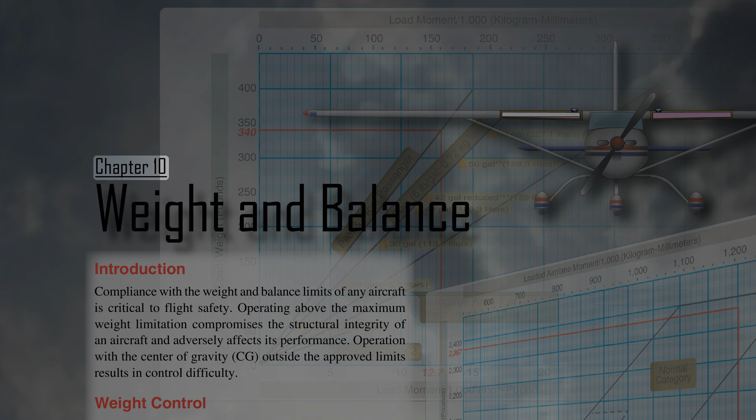Introduction. Compliance with the weight and balance limits of any aircraft is critical to flight safety. Operating above the maximum weight limitation compromises the structural integrity of an aircraft and adversely affects its performance. Operation with the center of gravity, CG, outside the approved limits results in control difficulty.

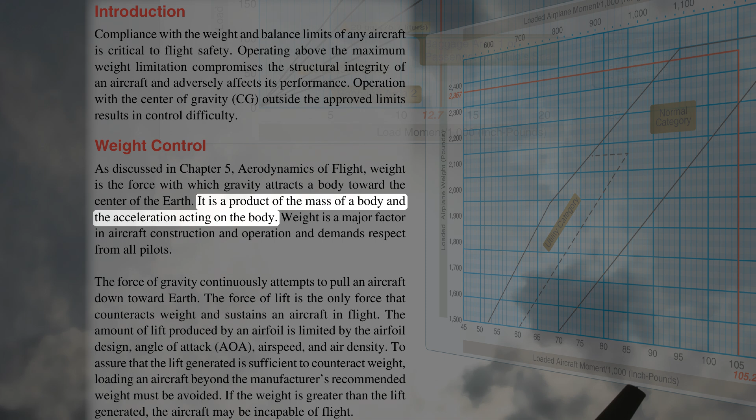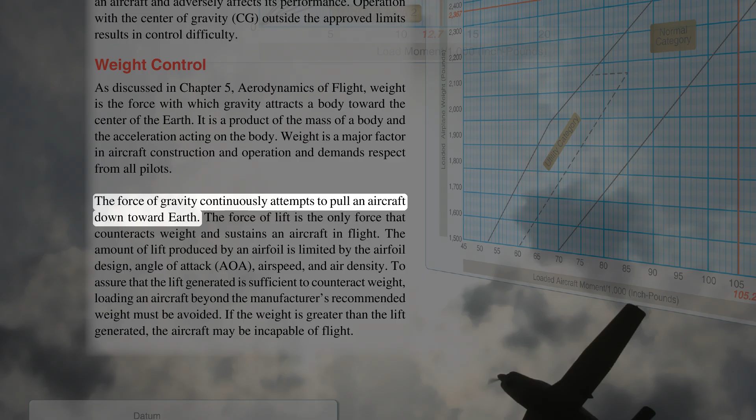Weight control. As discussed in Chapter 5, Aerodynamics of Flight, weight is the force with which gravity attracts a body toward the center of the Earth. It is a product of the mass of a body and the acceleration acting on the body. Weight is a major factor in aircraft construction and operation and demands respect from all pilots. The force of gravity continuously attempts to pull an aircraft down toward Earth. The force of lift is the only force that counteracts weight and sustains an aircraft in flight.

The amount of lift produced by an airfoil is limited by the airfoil design, angle of attack, airspeed, and air density. To assure that the lift generated is sufficient to counteract weight, loading an aircraft beyond the manufacturer's recommended weight must be avoided. If the weight is greater than the lift generated, the aircraft may be incapable of flight.

Effects of weight. Any item aboard an aircraft that increases the total weight is undesirable for performance. Manufacturers attempt to make an aircraft as light as possible without sacrificing strength or safety. The pilot should always be aware of the consequences of overloading. An overloaded aircraft may not be able to leave the ground, or if it does become airborne, it may exhibit unexpected and unusually poor flight characteristics.

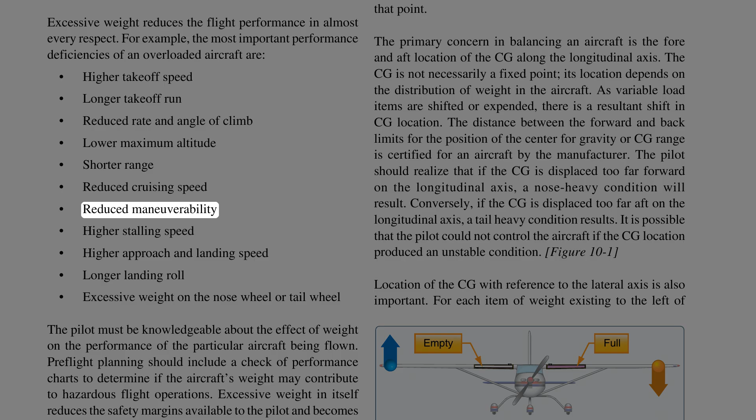If not properly loaded, the initial indication of poor performance usually takes place during takeoff. Excessive weight reduces the flight performance in almost every respect. For example, the most important performance deficiencies of an overloaded aircraft are higher takeoff speed, longer takeoff run, reduced rate and angle of climb, lower maximum altitude, shorter range, reduced cruising speed, reduced maneuverability, higher stalling speed, higher approach and landing speed, longer landing roll, and excessive weight on the nosewheel or tailwheel.

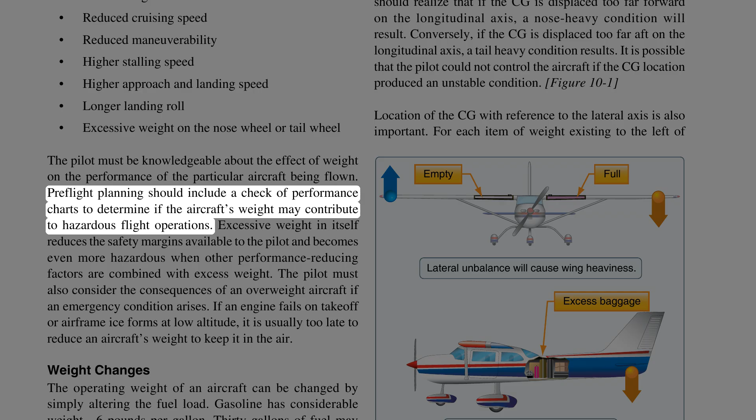The pilot must be knowledgeable about the effect of weight on the performance of the particular aircraft being flown. Pre-flight planning should include a check of performance charts to determine if the aircraft's weight may contribute to hazardous flight operations. Excessive weight in itself reduces the safety margins available to the pilot and becomes even more hazardous when other performance-reducing factors are combined with excess weight.

The pilot must also consider the consequences of an overweight aircraft if an emergency condition arises. If an engine fails on takeoff or airframe ice forms at low altitude, it is usually too late to reduce an aircraft's weight to keep it in the air.

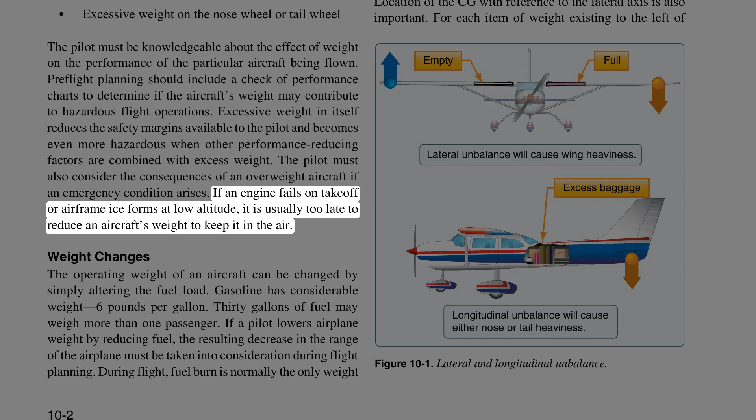Weight changes. The operating weight of an aircraft can be changed by simply altering the fuel load. Gasoline has considerable weight, 6 pounds per gallon. 30 gallons of fuel may weigh more than one passenger. If a pilot lowers airplane weight by reducing fuel, the resulting decrease in the range of the airplane must be taken into consideration during flight planning.

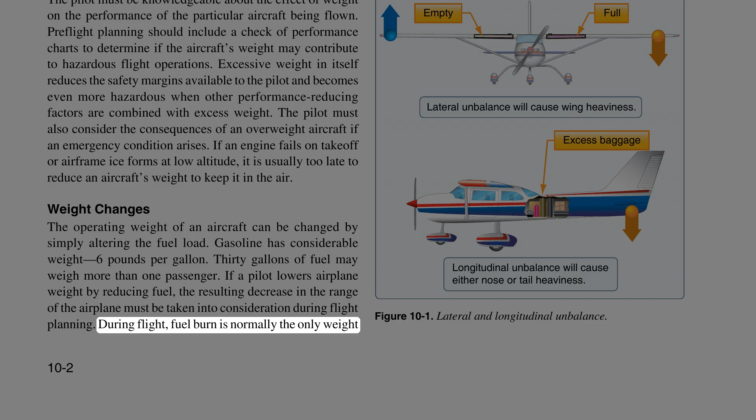During flight, fuel burn is normally the only weight change that takes place. As fuel is used, an aircraft becomes lighter and performance is improved. Changes of fixed equipment have a major effect upon the weight of an aircraft. The installation of extra radios or instruments, as well as repairs or modifications, may also affect the weight of an aircraft.

Balance, stability, and center of gravity. Balance refers to the location of the CG of an aircraft, and is important to stability and safety in flight. The CG is a point at which the aircraft would balance if it were suspended at that point. The primary concern in balancing an aircraft is the fore and aft location of the CG along the longitudinal axis.

The CG is not necessarily a fixed point. Its location depends on the distribution of weight in the aircraft. As variable load items are shifted or expended, there is a resultant shift in CG location. The distance between the forward and back limits for the position of the center of gravity, or CG range, is certified for an aircraft by the manufacturer.

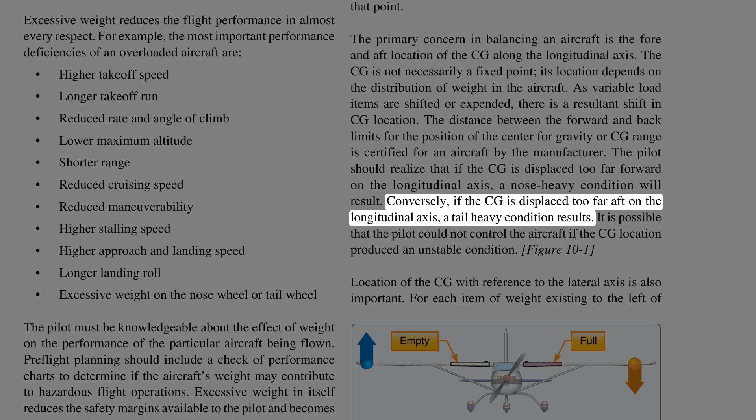The pilot should realize that if the CG is displaced too far forward on the longitudinal axis, a nose-heavy condition will result. Conversely, if the CG is displaced too far aft on the longitudinal axis, a tail-heavy condition results. It is possible that the pilot could not control the aircraft if the CG location produced an unstable condition.

Location of the CG with reference to the lateral axis is also important. For each item of weight existing to the left of the fuselage centerline, there is an equal weight existing at a corresponding location on the right. This may be upset by unbalanced lateral loading. The position of the lateral CG is not computed in all aircraft, but the pilot must be aware that adverse effects arise as a result of a laterally unbalanced condition.

In an airplane, lateral unbalance occurs if the fuel load is mismanaged by supplying the engines unevenly from tanks on one side of the airplane.

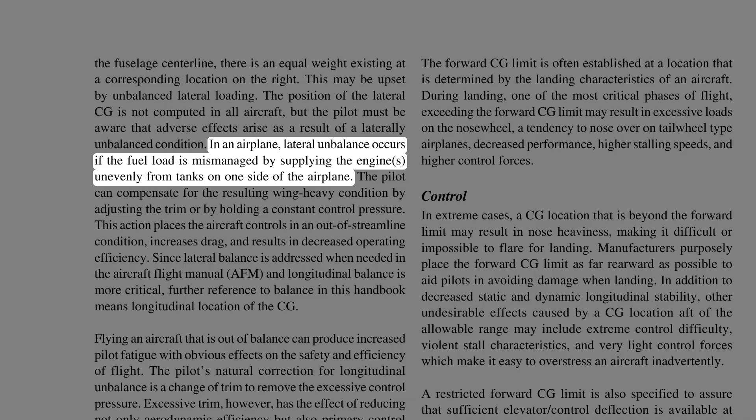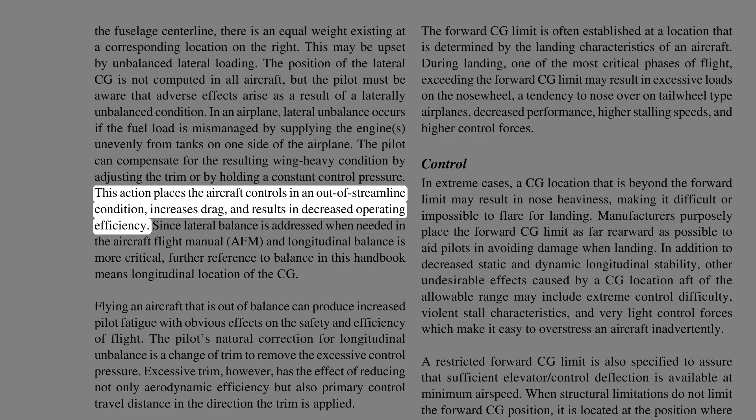The pilot can compensate for the resulting wing-heavy condition by adjusting the trim or by holding a constant control pressure. This action places the aircraft controls in an out-of-streamline condition, increases drag, and results in decreased operating efficiency.

Since lateral balance is addressed when needed in the Aircraft Flight Manual (AFM), and longitudinal balance is more critical, further reference to balance in this handbook means longitudinal location of the CG.

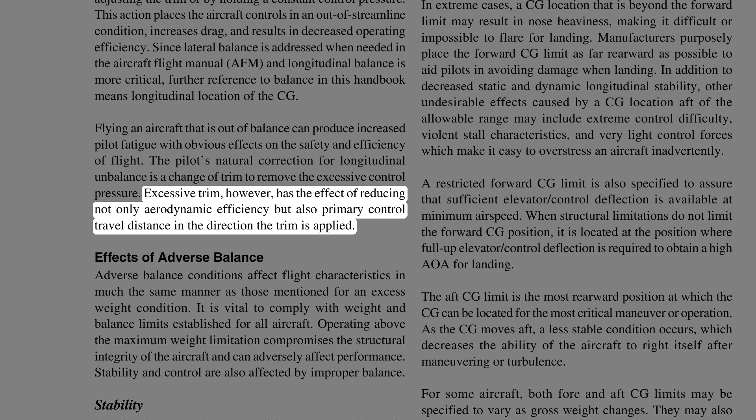Flying an aircraft that is out of balance can produce increased pilot fatigue, with obvious effects on the safety and efficiency of flight. The pilot's natural correction for longitudinal unbalance is a change of trim to remove the excessive control pressure. Excessive trim, however, has the effect of reducing not only aerodynamic efficiency but also primary control travel distance in the direction the trim is applied.

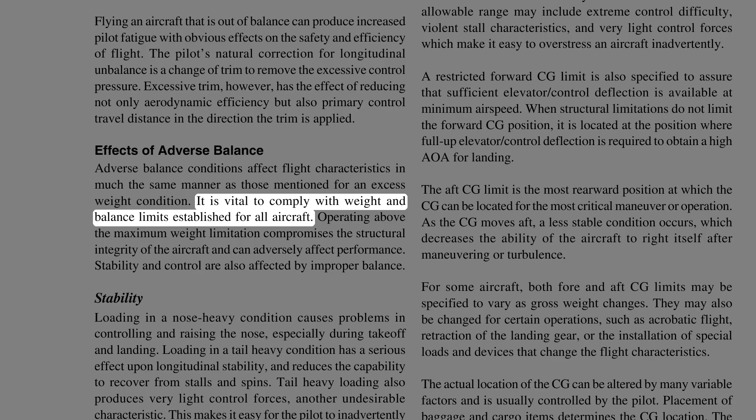Effects of adverse balance. Adverse balance conditions affect flight characteristics in much the same manner as those mentioned for an excess weight condition. It is vital to comply with weight and balance limits established for all aircraft. Operating above the maximum weight limitation compromises the structural integrity of the aircraft and can adversely affect performance. Stability and control are also affected by improper balance.

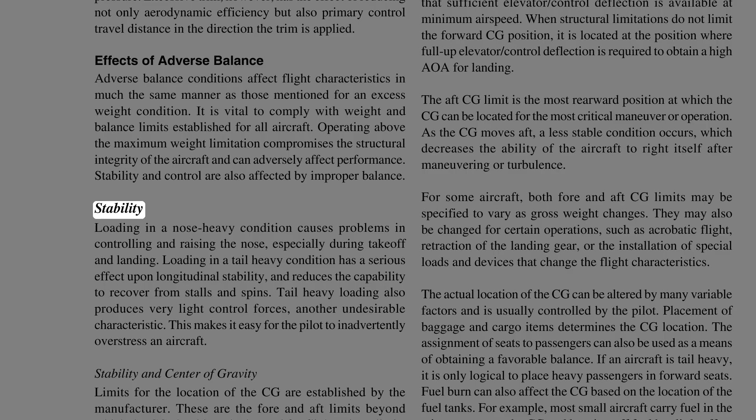Stability. Loading in a nose-heavy condition causes problems in controlling and raising the nose, especially during takeoff and landing. Loading in a tail-heavy condition has a serious effect upon longitudinal stability, and reduces the capability to recover from stalls

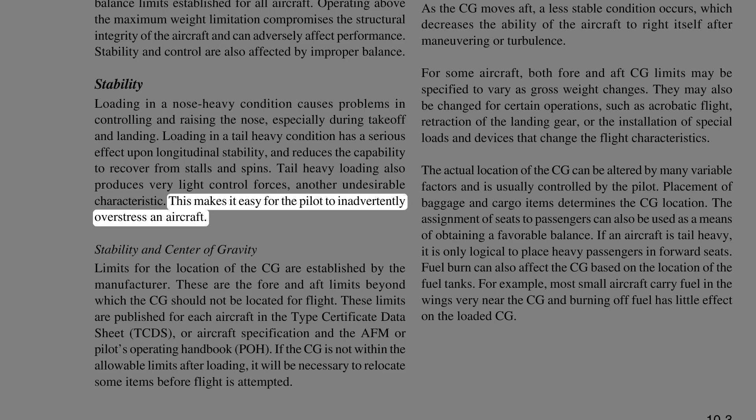and spins. Tail-heavy loading also produces very light control forces, another undesirable characteristic. This makes it easy for the pilot to inadvertently overstress an aircraft.

Stability and center of gravity. Limits for the location of the CG are established by the manufacturer. These are the fore and aft limits beyond which the CG should not be located for flight.

These limits are published for each aircraft in the Type Certificate Datasheet (TCDS), or Aircraft Specification, and the AFM or Pilot's Operating Handbook (POH). If the CG is not within the allowable limits after loading, it will be necessary to relocate some items before flight is attempted.

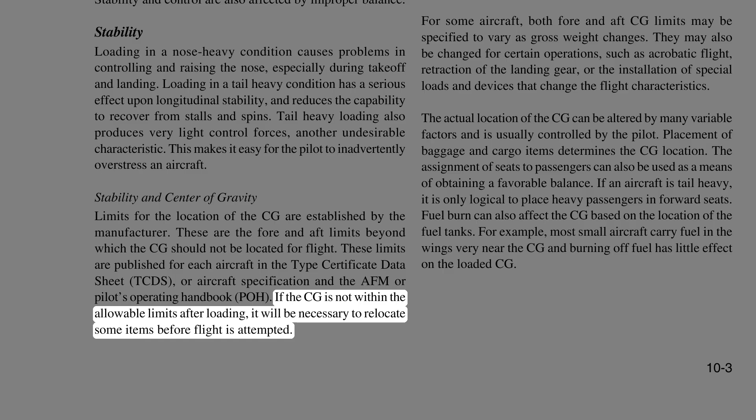The forward CG limit is often established at a location that is determined by the landing characteristics of an aircraft. During landing, one of the most critical phases of flight, exceeding the forward CG limit may result in excessive loads on the nosewheel, a tendency to nose over on tailwheel-type airplanes, decreased performance, higher stalling speeds, and higher control forces.

Control. In extreme cases, a CG location that is beyond the forward limit may result in nose heaviness, making it difficult or impossible to flare for landing. Manufacturers purposely place the forward CG limit as far rearward as possible to aid pilots in avoiding damage when landing.

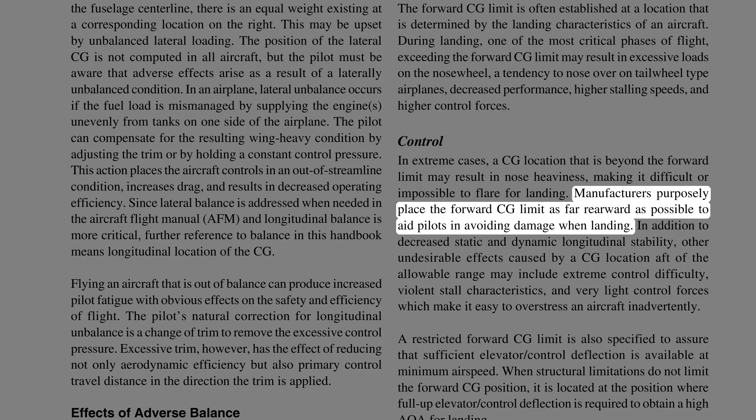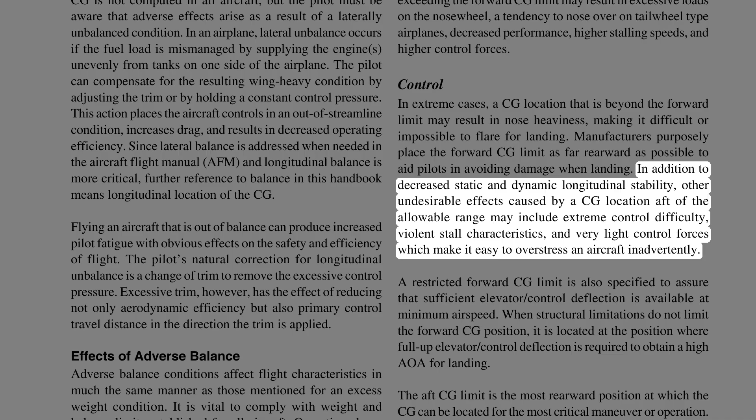In addition to decreased static and dynamic longitudinal stability, other undesirable effects caused by a CG location aft of the allowable range may include extreme control difficulty, violent stall characteristics, and very light control forces which make it easy to overstress an aircraft inadvertently. A restricted forward CG limit is also specified to assure that sufficient elevator control deflection is

available at minimum airspeed. When structural limitations do not limit the forward CG position, it is located at the position where full-up elevator control deflection is required to obtain a high angle of attack for landing.

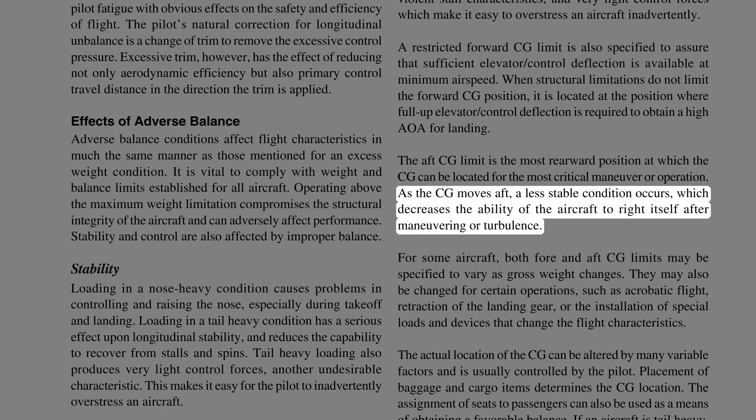The aft CG limit is the most rearward position at which the CG can be located for the most critical maneuver or operation. As the CG moves aft, a less stable condition occurs, which decreases the ability of the aircraft to right itself after maneuvering or turbulence.

For some aircraft, both fore and aft CG limits may be specified to vary as gross weight changes. They may also be changed for certain operations, such as acrobatic flight, retraction of the landing gear, or the installation of special loads and devices that change the flight characteristics.

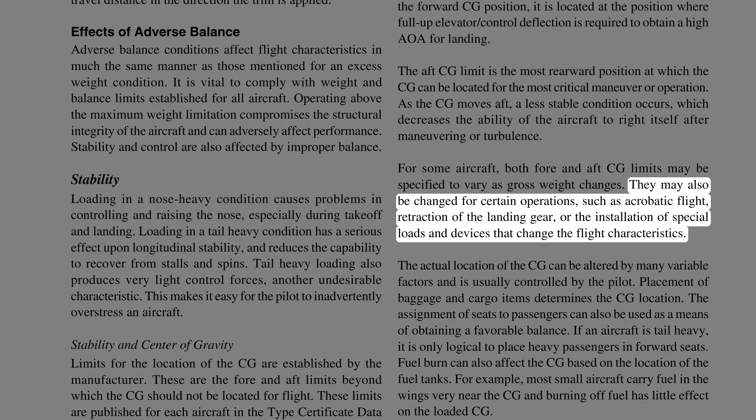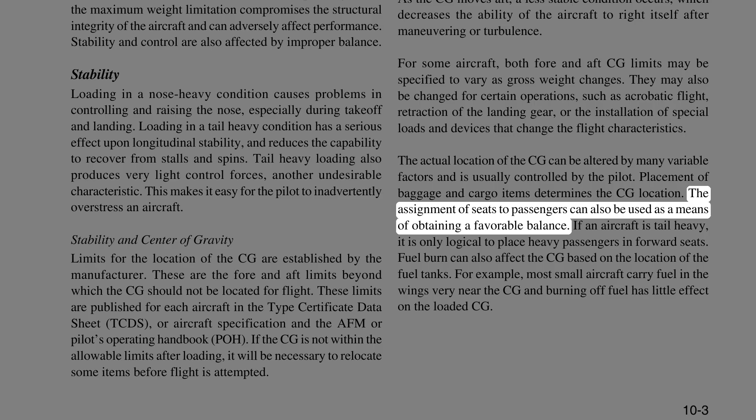The actual location of the CG can be altered by many variable factors and is usually controlled by the pilot. Placement of baggage and cargo items determines the CG location. The assignment of seats to passengers can also be used as a means of obtaining a favorable balance. If an aircraft is tail-heavy, it is only logical to place heavy passengers in forward seats.

Fuel burn can also affect the CG based on the location of the fuel tanks. For example, most small aircraft carry fuel in the wings very near the CG, and burning off fuel has little effect on the loaded CG.

Management of weight and balance control. Title 14 of the Code of Federal Regulations (14 CFR) Part 23, Section 23.23 requires establishment of the ranges of weights and CGs within which an aircraft may be operated safely.

The manufacturer provides this information, which is included in the approved AFM, TCDS, or aircraft specifications. While there are no specified requirements for a pilot operating under 14 CFR Part 91 to conduct weight and balance calculations prior to each flight, 14 CFR Part 91, Section 91.9 requires the pilot in command (PIC), to comply with the operating limits in the approved AFM.

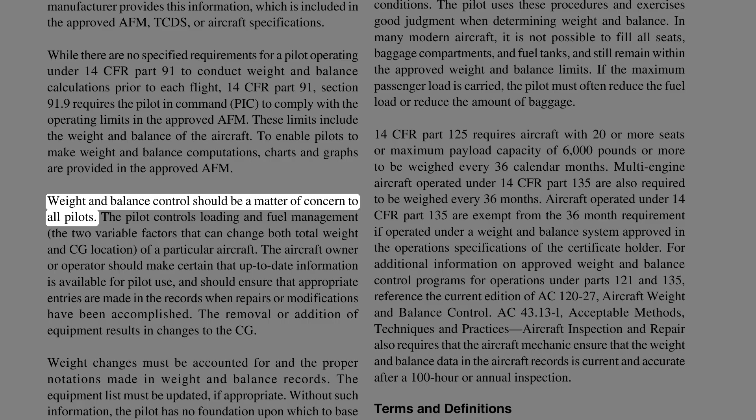These limits include the weight and balance of the aircraft. To enable pilots to make weight and balance computations, charts and graphs are provided in the approved AFM. Weight and balance control should be a matter of concern to all pilots. The pilot controls loading and fuel management, the two variable factors that can change both total weight and CG location

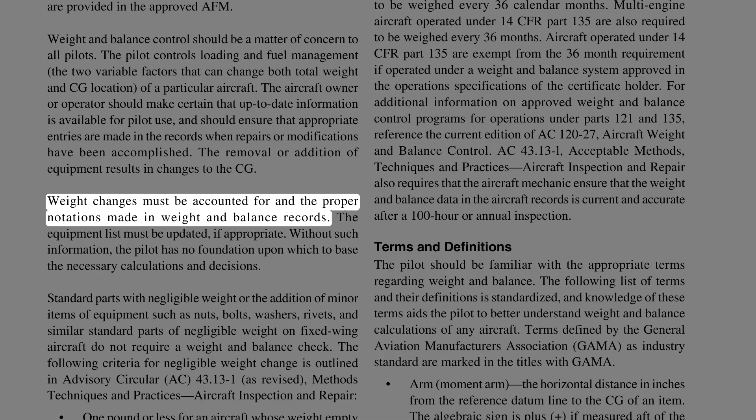of a particular aircraft. The aircraft owner or operator should make certain that up-to-date information is available for pilot use, and should ensure that appropriate entries are made in the records when repairs or modifications have been accomplished. The removal or addition of equipment results in changes to the CG. Weight changes must be accounted for and the proper notations made in weight and balance records. The equipment list must be updated, if appropriate. Without such information, the pilot has no foundation upon which to base the necessary calculations and decisions.

Standard parts with negligible weight, such as the addition of minor items of equipment like nuts, bolts, washers, rivets, and similar standard parts of negligible weight on fixed-wing aircraft, do not require a weight and balance check. The following criteria for negligible weight change is outlined in Advisory Circular AC 43.13-1, as revised, Methods, Techniques and Practices, Aircraft Inspection and Repair.

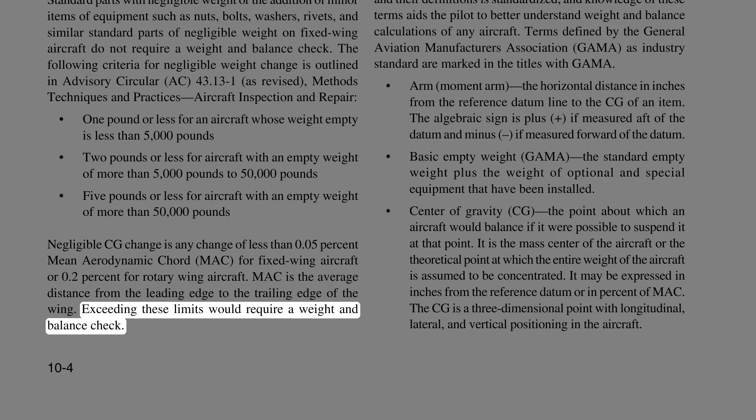1 pound or less for an aircraft whose empty weight is less than 5,000 pounds. 2 pounds or less for aircraft with an empty weight of more than 5,000 pounds to 50,000 pounds. 5 pounds or less for aircraft with an empty weight of more than 50,000 pounds. Negligible CG change is any change of less than 0.05% mean aerodynamic chord, MAC, for fixed-wing aircraft, or 0.2% for rotary-wing aircraft. MAC is the average distance from the leading edge to the trailing edge of the wing. Exceeding these limits would require a weight and balance check.

Before any flight, the pilot should determine the weight and balance condition of the aircraft. Simple and orderly procedures based on sound principles have been devised by the manufacturer for the determination of loading conditions. The pilot uses these procedures and exercises good judgment when determining weight and balance. In many modern aircraft, it is not possible to fill all seats, baggage compartments, and fuel tanks, and still remain within the approved weight and balance limits.

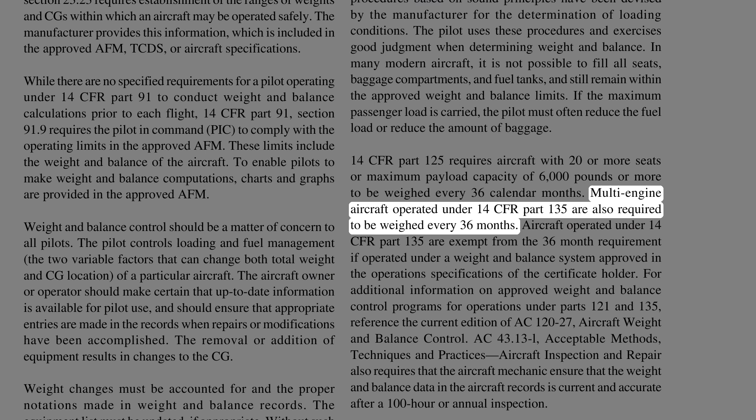If the maximum passenger load is carried, the pilot must often reduce the fuel load or reduce the amount of baggage. 14 CFR Part 125 requires aircraft with 20 or more seats or maximum payload capacity of 6,000 pounds or more to be weighed every 36 calendar months. Multi-engine aircraft operated under 14 CFR Part 135 are also required to be weighed every 36 months.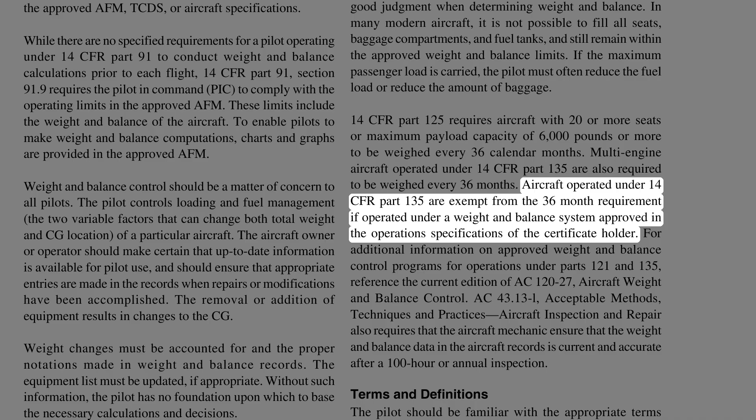Aircraft operated under 14 CFR Part 135 are exempt from the 36-month requirement if operated under a weight and balance system approved in the operation specifications of the certificate holder. For additional information on approved weight and balance control programs for operations under Parts 121 and 135, reference the current edition of AC 120-27, Aircraft Weight and Balance Control.

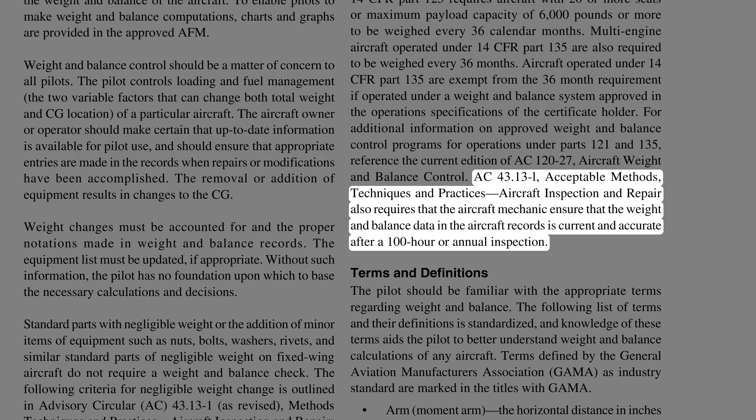AC 43.13-1, Acceptable Methods, Techniques and Practices, Aircraft Inspection and Repair, also requires that the aircraft mechanic ensure that the weight and balance data in the aircraft records is current and accurate after a 100-hour or annual inspection. Terms and definitions: the pilot should be familiar with the appropriate terms regarding weight and balance. The following list of terms and their definitions is standardized, and knowledge of these terms aids the pilot to better understand weight and balance calculations of any aircraft. Terms defined by the General Aviation Manufacturers Association, GAMA, as industry standard are marked in the titles with GAMA.

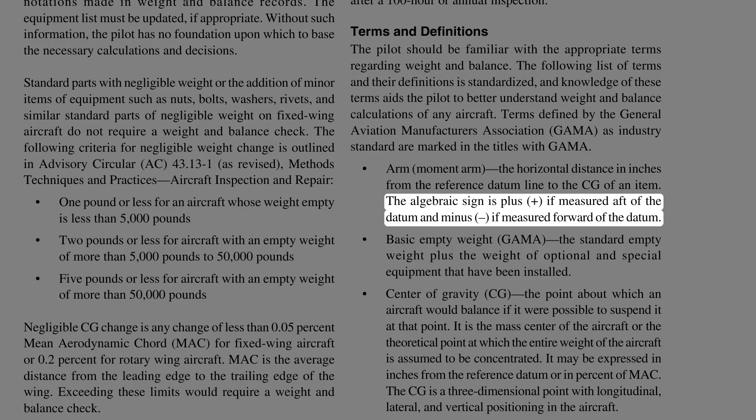Arm, or moment arm, is the horizontal distance in inches from the reference datum line to the CG of an item. The algebraic sign is plus if measured aft of the datum, and minus if measured forward of the datum. Basic empty weight (GAMA) is the standard empty weight plus the weight of optional and special equipment that have been installed. Center of gravity, CG, is the point about which an aircraft would balance if it were possible to suspend it at that point. It is the mass center of the aircraft, or the theoretical point at which the entire weight of the aircraft is assumed to be concentrated.

It may be expressed in inches from the reference datum or in percent of MAC. The CG is a three-dimensional point with longitudinal, lateral, and vertical positioning in the aircraft. CG limits are the specified forward and aft points within which the CG must be located during flight. These limits are indicated on pertinent aircraft specifications. CG range is the distance between the forward and aft CG limits indicated on pertinent aircraft specifications.

Datum, or reference datum, is an imaginary vertical plane or line from which all measurements of arm are taken. The datum is established by the manufacturer. Once the datum has been selected, all moment arms and the location of CG range are measured from this point. Delta is a Greek letter expressed by the symbol delta, used to indicate a change of values.

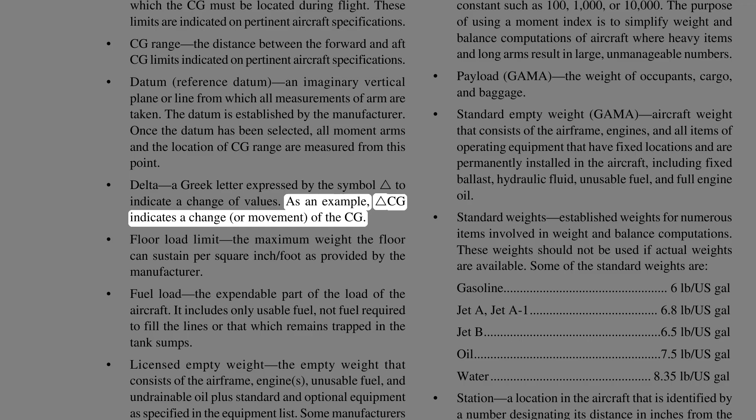As an example, delta CG indicates a change, or movement, of the CG. Floor load limit is the maximum weight the floor can sustain per square inch, foot, as provided by the manufacturer.

Fuel load is the expendable part of the load of the aircraft. It includes only usable fuel, not fuel required to fill the lines or that which remains trapped in the tank sumps.

Licensed empty weight is the empty weight that consists of the airframe, engines, unusable fuel, and undrainable oil, plus standard and optional equipment as specified in the equipment list. Some manufacturers used this term prior to standardization.

Maximum landing weight is the greatest weight that an aircraft is normally allowed to have at landing.

Maximum ramp weight is the total weight of a loaded aircraft including all fuel. It is greater than the takeoff weight due to the fuel that will be burned during the taxi and run-up operations. Ramp weight may also be referred to as taxi weight.

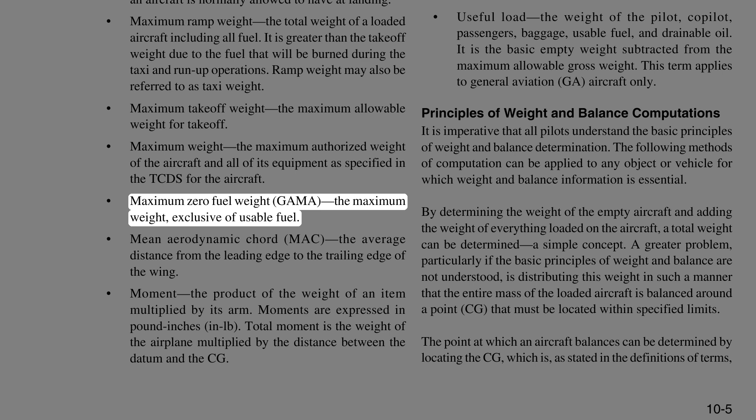Maximum takeoff weight is the maximum allowable weight for takeoff. Maximum weight is the maximum authorized weight of the aircraft and all of its equipment as specified in the TCDS for the aircraft. Maximum zero fuel weight is the maximum weight, exclusive of usable fuel.

Mean aerodynamic chord is the average distance from the leading edge to the trailing edge of the wing. Moment is the product of the weight of an item multiplied by its arm. Moments are expressed in pound-inches, or inch-pounds. Total moment is the weight of the airplane multiplied by the distance between the datum and the CG.

Moment index, or index, is a moment divided by a constant such as 100, 1000, or 10,000. The purpose of using a moment index is to simplify weight and balance computations of aircraft where heavy items and long arms result in large, unmanageable numbers.

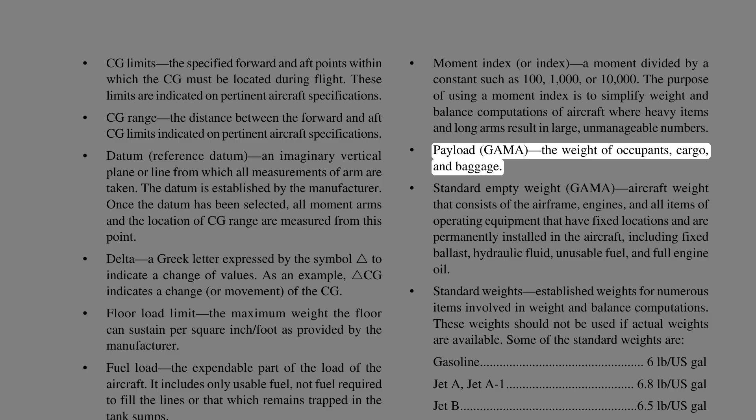Payload is the weight of occupants, cargo, and baggage. Standard empty weight is aircraft weight that consists of the airframe, engines, and all items of operating equipment that have fixed locations and are permanently installed in the aircraft, including fixed ballast, hydraulic fluid, unusable fuel, and full engine oil.

Standard weights are established weights for numerous items involved in weight and balance computations. These weights should not be used if actual weights are available.

Some of the standard weights are: gasoline, 6 pounds per US gallon; Jet A-1, 6.8 pounds per US gallon; Jet B; oil; and water, 8.35 pounds per US gallon.

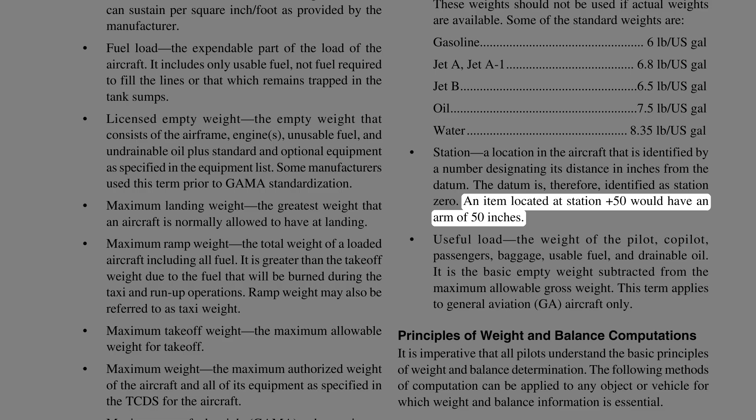The datum is, therefore, identified as Station 0. Station is a location in the aircraft that is identified by a number designating its distance in inches from the datum. An item located at station plus 50 would have an arm of 50 inches.

Useful load is the weight of the pilot, co-pilot, passengers, baggage, usable fuel, and drainable oil. It is the basic empty weight subtracted from the maximum allowable gross weight. This term applies to general aviation, GA, aircraft only.

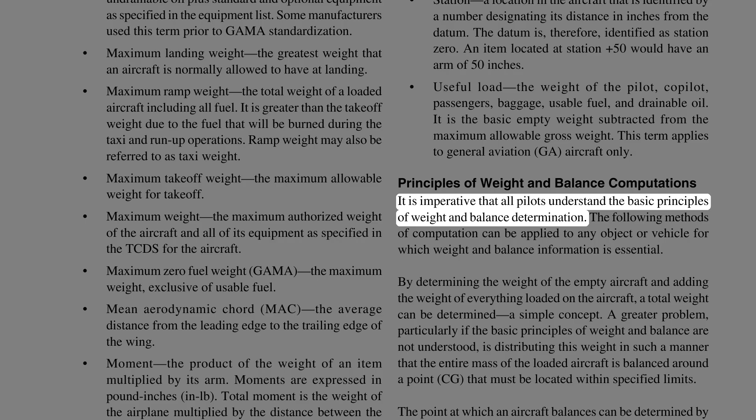Principles of weight and balance computations. It is imperative that all pilots understand the basic principles of weight and balance determination. The following methods of computation can be applied to any object or vehicle for which weight and balance information is essential.

By determining the weight of the empty aircraft and adding the weight of everything loaded on the aircraft, a total weight can be determined—a simple concept. A greater problem, particularly if the basic principles of weight and balance are not understood, is distributing this weight in such a manner that the entire mass of the loaded aircraft is balanced around a point.

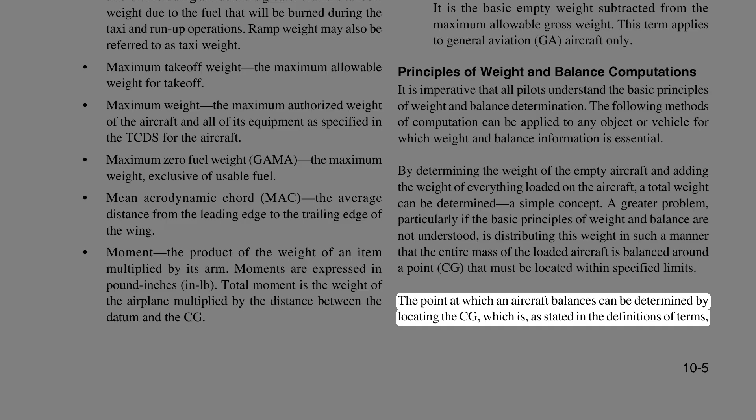That point, the CG, must be located within specified limits. The point at which an aircraft balances can be determined by locating the CG, which is, as stated in the definitions of terms, the imaginary point at which all the weight is concentrated.

To provide the necessary balance between longitudinal stability and elevator control, the CG is usually located slightly forward of the center of lift. This loading condition causes a nose-down tendency in flight, which is desirable during flight at a high angle of attack and slow speeds.

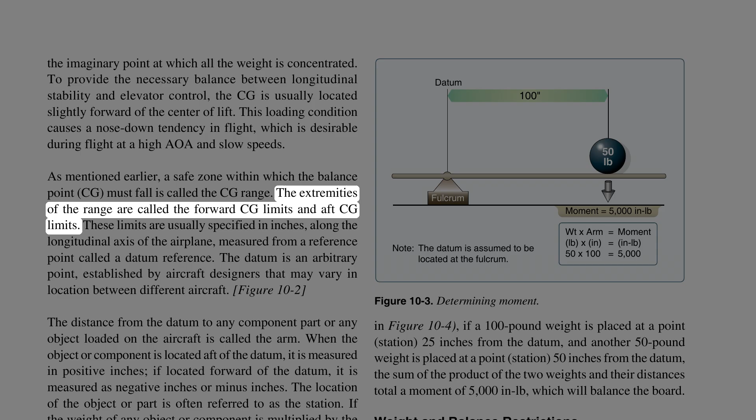As mentioned earlier, a safe zone within which the balance point, CG, must fall is called the CG range. The extremities of the range are called the forward CG limits and aft CG limits. These limits are usually specified in inches, along the longitudinal axis of the airplane, measured from a reference point called a datum reference.

The datum is an arbitrary point established by aircraft designers that may vary in location between different aircraft. The distance from the datum to any component part or any object loaded on the aircraft is called the arm. When the object or component is located aft of the datum, it is measured in positive inches.

If located forward of the datum, it is measured as negative inches, or minus inches. The location of the object or part is often referred to as the station.

If the weight of any object or component is multiplied by the distance from the datum, the arm, the product is the moment. The moment is the measurement of the gravitational force that causes a tendency of the weight to rotate about a point or axis, and is expressed in inch-pounds.

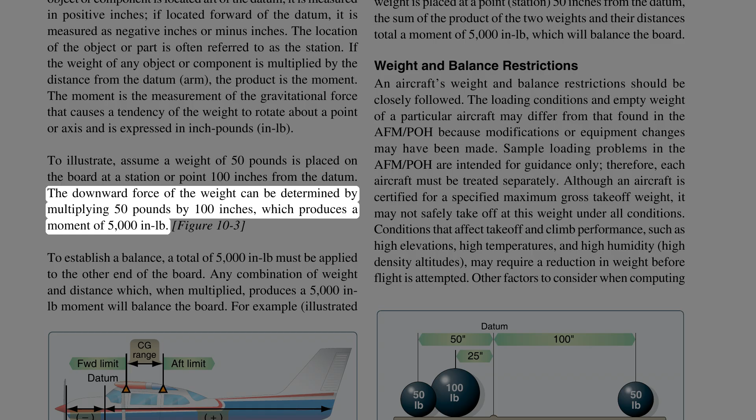To illustrate, assume a weight of 50 pounds is placed on the board at a station, or point, 100 inches from the datum. The downward force of the weight can be determined by multiplying 50 pounds by 100 inches, which produces a moment of 5,000 inch-pounds.

To establish a balance, a total of 5,000 inch-pounds must be applied to the other end of the board. Any combination of weight and distance which, when multiplied, produces a 5,000 inch-pound moment will balance the board.

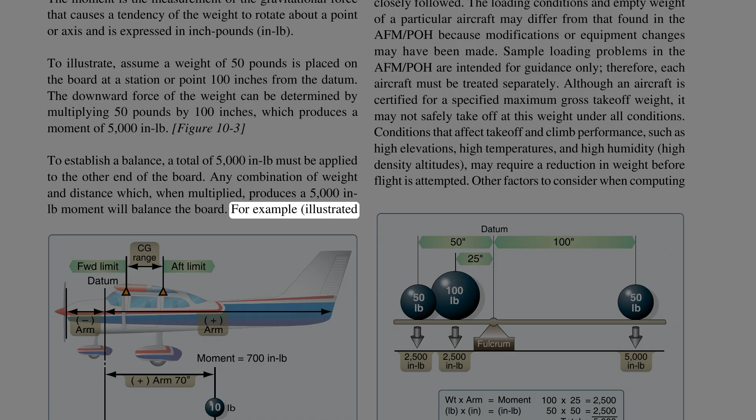For example, illustrated in figure 10-4, if a 100-pound weight is placed at a point, station, 25 inches from the datum, and another 50-pound weight is placed at a point, station, 50 inches from the datum, the sum of the products of the two weights and their distances total a moment of 5,000 inch-pounds, which will balance the board.

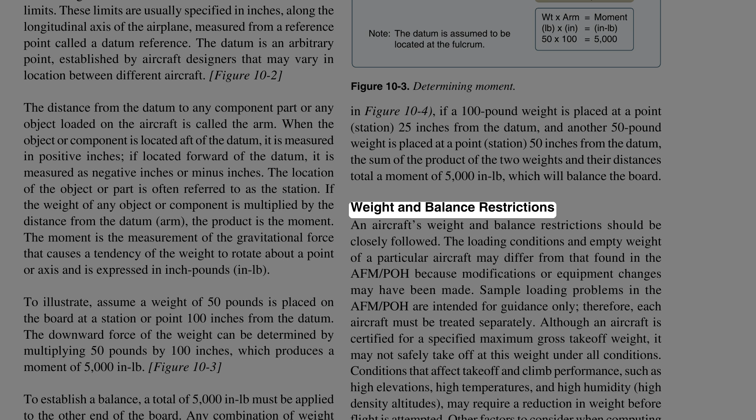Weight and balance restrictions. An aircraft's weight and balance restrictions should be closely followed. The loading conditions and empty weight of a particular aircraft may differ from that found in the AFM/POH because modifications or equipment changes may have been made.

Sample loading problems in the AFM/POH are intended for guidance only. Therefore, each aircraft must be treated separately.

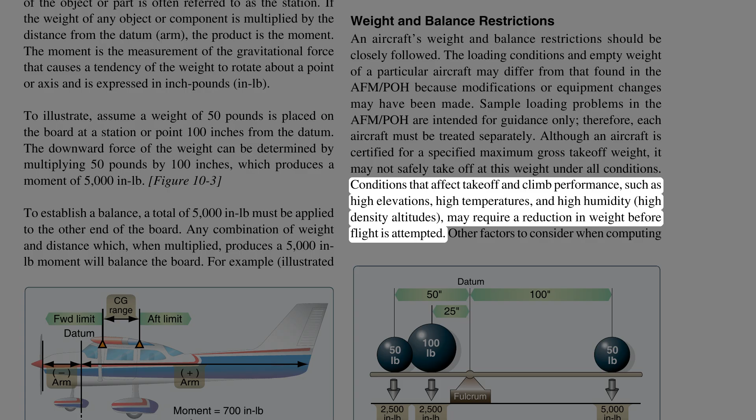Although an aircraft is certified for a specified maximum gross takeoff weight, it may not safely take off at this weight under all conditions. Conditions that affect takeoff and climb performance, such as high elevations, high temperatures, and high humidity, and high-density altitudes, may require a reduction in weight before flight is attempted.

Other factors to consider when computing weight and balance distribution prior to takeoff are runway length, runway surface, runway slope, surface wind, and the presence of obstacles. These factors may require a reduction in or redistribution of weight prior to flight.

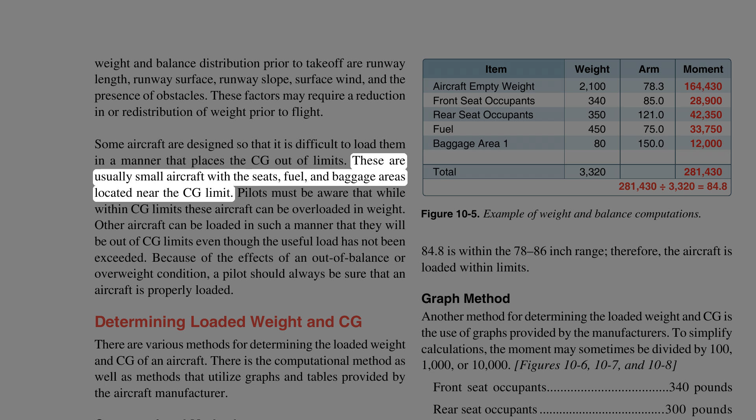Some aircraft are designed so that it is difficult to load them in a manner that places the CG out of limits. These are usually small aircraft with the seats, fuel, and baggage areas located near the CG limit. Pilots must be aware that while within CG limits, these aircraft can be overloaded in weight.

Other aircraft can be loaded in such a manner that they will be out of CG limits even though the useful load has not been exceeded. Because of the effects of an out-of-balance or overweight condition, a pilot should always be sure that an aircraft is properly loaded. Determining loaded weight and CG.

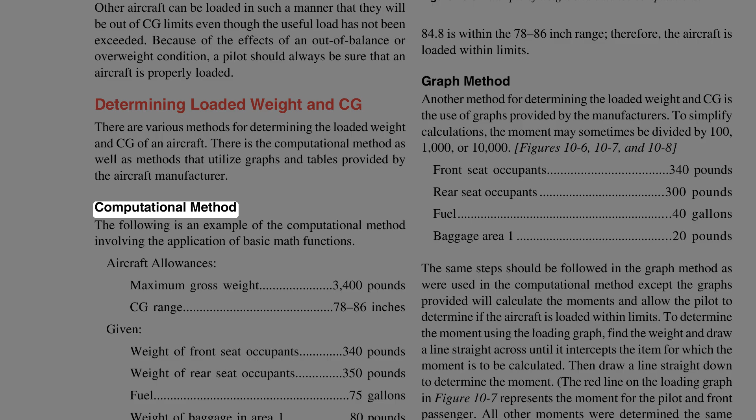There are various methods for determining the loaded weight and CG of an aircraft. There is the computational method as well as methods that utilize graphs and tables provided by the aircraft manufacturer. Computational method: the following is an example of the computational method involving the application of basic math functions.

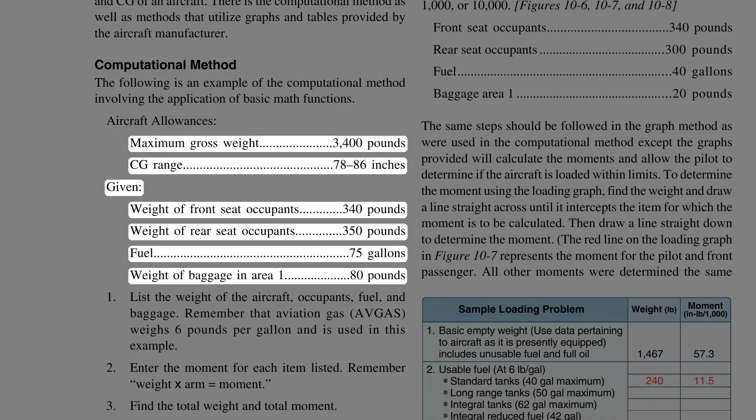Aircraft allowances: maximum gross weight 3,400 pounds, CG range 78 to 86 inches given. Weight of front seat occupants 340 pounds, weight of rear seat occupants 350 pounds, fuel 75 gallons, weight of baggage in area 1 80 pounds. List the weight of the aircraft, occupants, fuel, and baggage. Remember that aviation gas, avgas, weighs 6 pounds per gallon and is used in this example.

Enter the moment for each item listed. Remember, weight times arm equals moment. Find the total weight and total moment. To determine the CG, divide the total moment by the total weight.

Note: the weight and balance records for a particular aircraft provide the empty weight and moment, as well as the information on the arm distance.

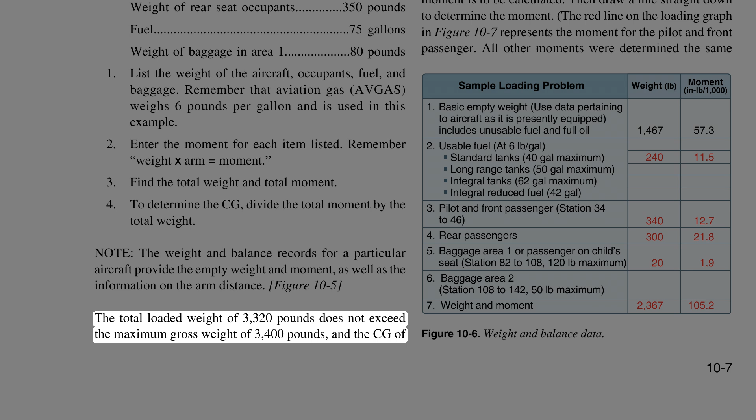The total loaded weight of 3,320 pounds does not exceed the maximum gross weight of 3,400 pounds, and the CG of 84.8 is within the 78 to 86 inch range. Therefore, the aircraft is loaded within limits.

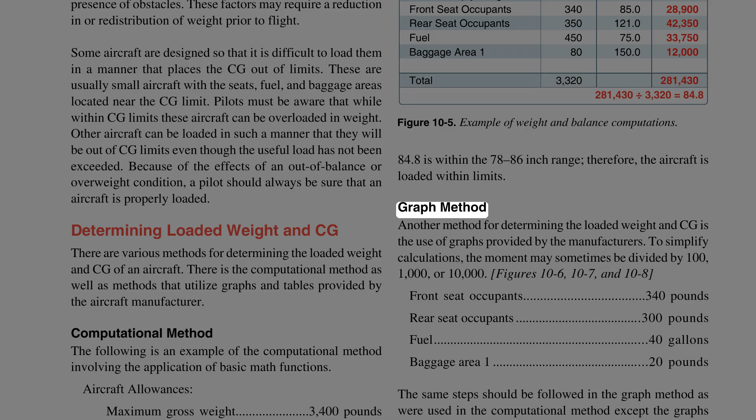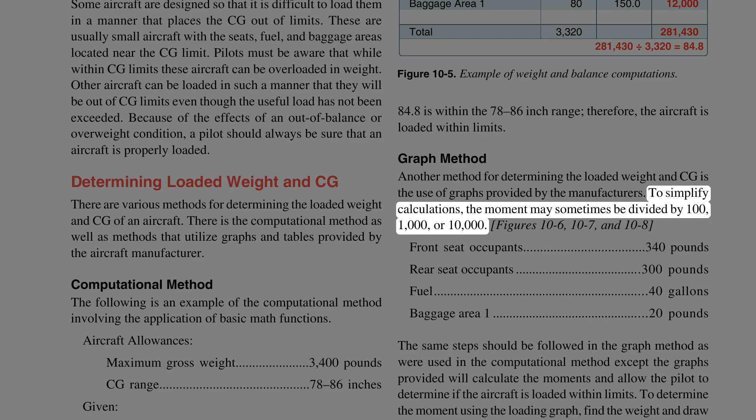Graph method. Another method for determining the loaded weight and CG is the use of graphs provided by the manufacturers. To simplify calculations, the moment may sometimes be divided by 100, 1,000, or 10,000.

Front seat occupants 340 pounds. Rear seat occupants 300 pounds. Fuel 40 gallons. Baggage area 1 20 pounds.

The same steps should be followed in the graph method as were used in the computational method, except the graphs provided will calculate the moments and allow the pilot to determine if the aircraft is loaded within limits.

To determine the moment using the loading graph, find the weight and draw a line straight across until it intercepts the item for which the moment is to be calculated. Then draw a line straight down to determine the moment.

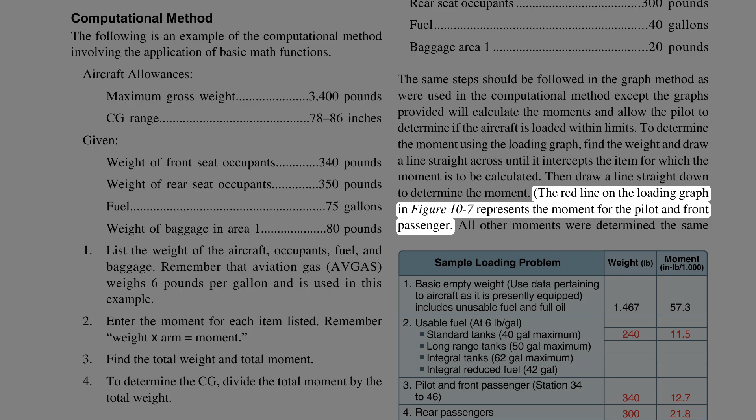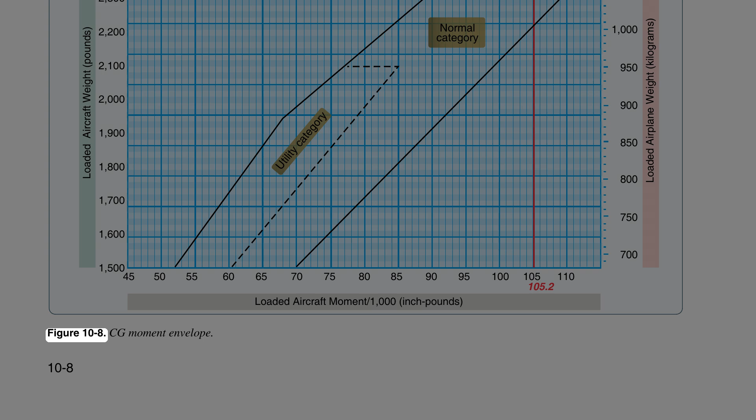Once this has been done for each item, total the weight and moments and draw a line for both weight and moment on the CG envelope graph. If the lines intersect within the envelope, the aircraft is loaded within limits. In this sample loading problem, the aircraft is loaded within limits.

Table method. The table method applies the same principles as the computational and graph methods.

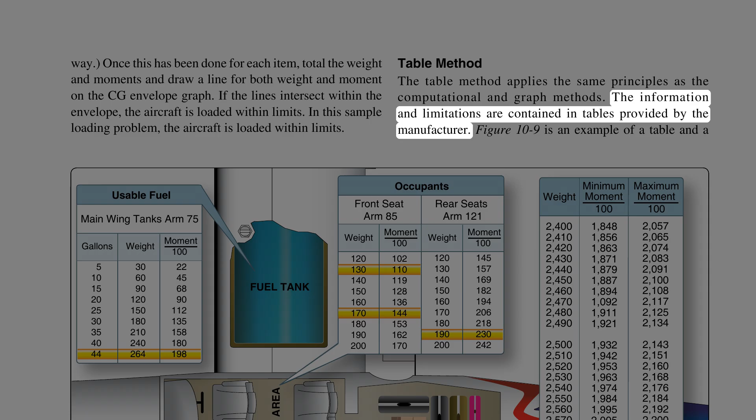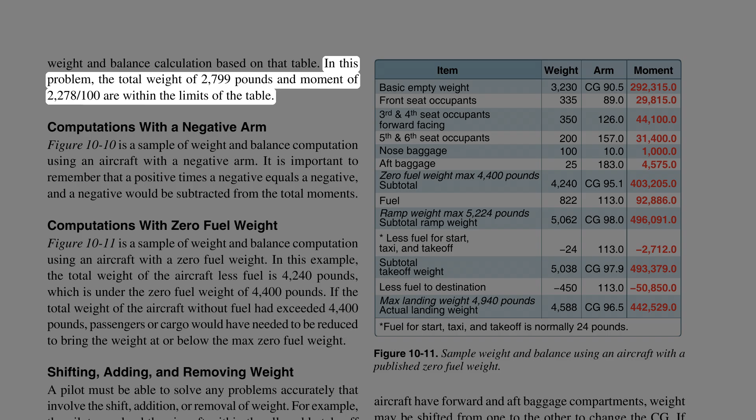The information and limitations are contained in tables provided by the manufacturer. Figure 10-9 is an example of a table and a weight and balance calculation based on that table. In this problem, the total weight of 2,799 pounds and moment of 2,278/100 are within the limits of the table.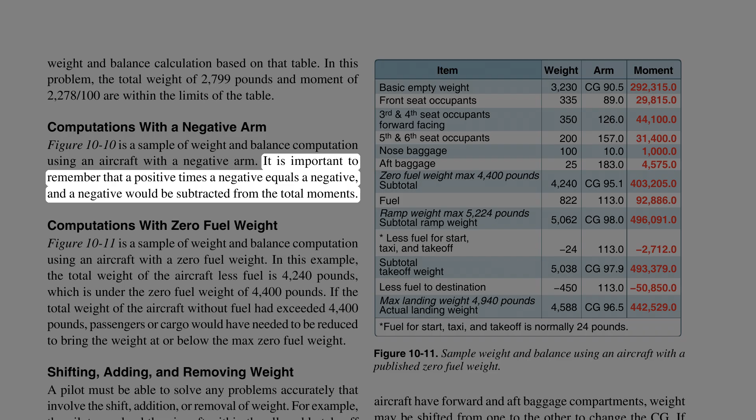Computations with a negative arm. Figure 10-10 is a sample of weight and balance computation using an aircraft with a negative arm. It is important to remember that a positive times a negative equals a negative, and a negative would be subtracted from the total moments.

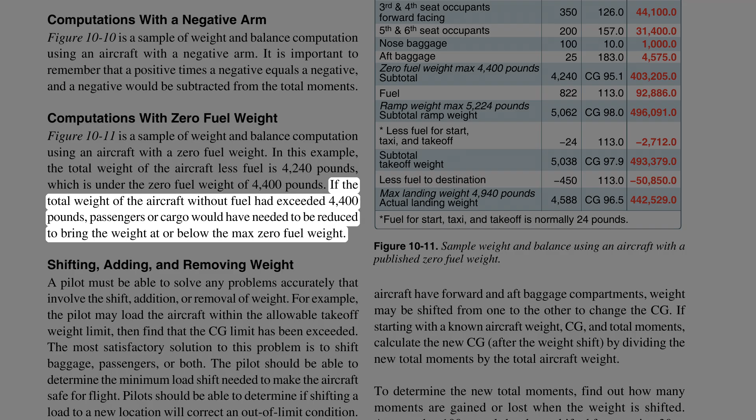Computations with zero fuel weight. Figure 10-11 is a sample of weight and balance computation using an aircraft with a zero fuel weight. In this example, the total weight of the aircraft less fuel is 4,240 pounds, which is under the zero fuel weight of 4,400 pounds. If the total weight of the aircraft without fuel had exceeded 4,400 pounds, passengers or cargo would have needed to be reduced to bring the weight at or below the max zero fuel weight.

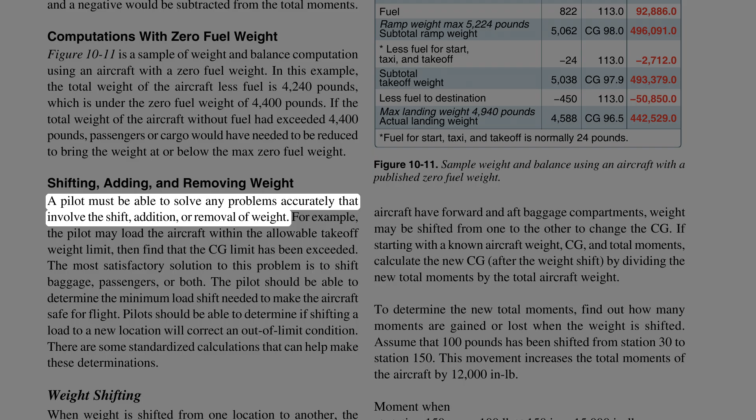Shifting, adding, and removing weight. A pilot must be able to solve any problems accurately that involve the shift, addition, or removal of weight. For example, the pilot may load the aircraft within the allowable takeoff weight limit, then find that the CG limit has been exceeded.

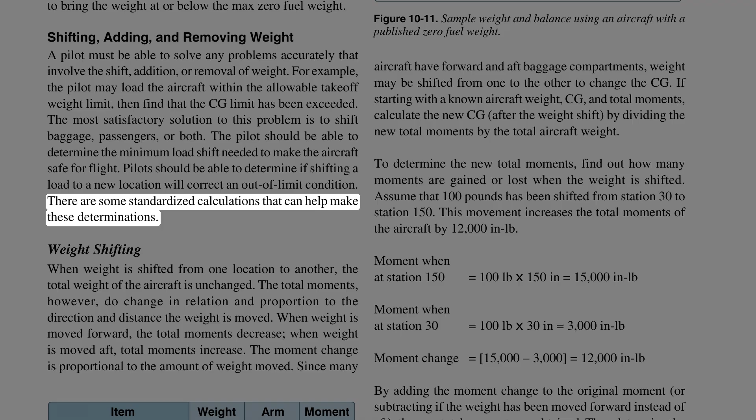The most satisfactory solution to this problem is to shift baggage, passengers, or both. The pilot should be able to determine the minimum load shift needed to make the aircraft safe for flight. Pilots should be able to determine if shifting a load to a new location will correct an out-of-limit condition. There are some standardized calculations that can help make these determinations.

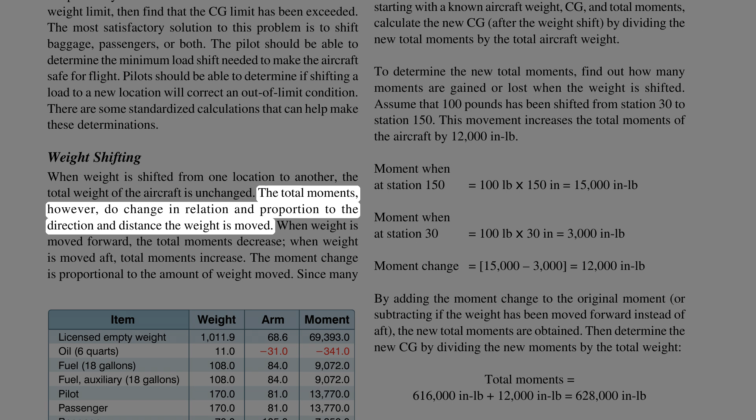Weight shifting. When weight is shifted from one location to another, the total weight of the aircraft is unchanged. The total moments, however, do change in relation and proportion to the direction and distance the weight is moved. When weight is moved forward, the total moments decrease. When weight is moved aft, total moments increase. The moment change is proportional to the amount of weight moved.

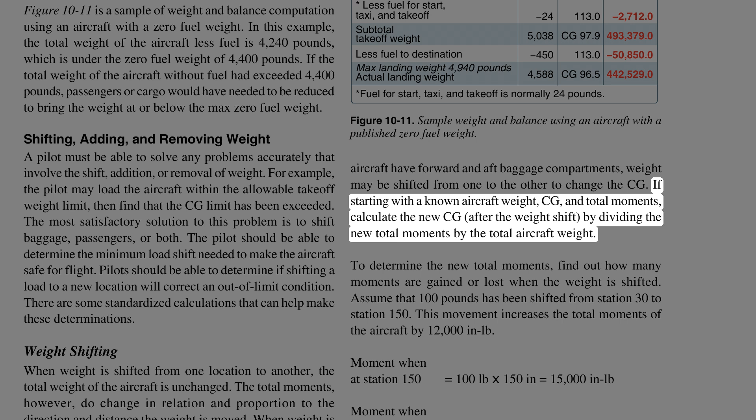Since many aircraft have forward and aft baggage compartments, weight may be shifted from one to the other to change the CG. If starting with a known aircraft weight, CG, and total moments, calculate the new CG after the weight shift by dividing the new total moments by the total aircraft weight. To determine the new total moments, find out how many moments are gained or lost when the weight is shifted.

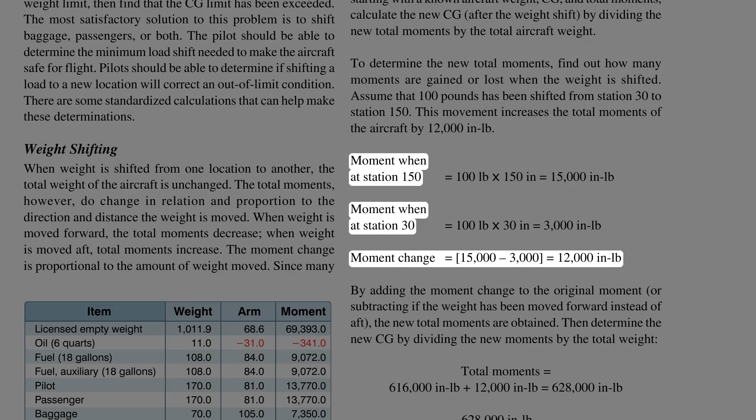Assume that 100 pounds has been shifted from station 30 to station 150. This movement increases the total moments of the aircraft by 12,000 inch-pounds. Moment when at station 150, minus moment when at station 30, gives a moment change of 12,000 inch-pounds. By adding the moment change to the original moment, or subtracting if the weight has been moved forward instead of aft, the new total moments are obtained.

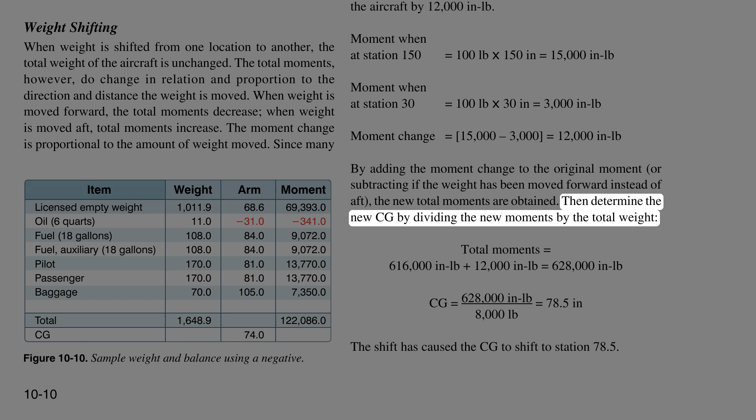Then determine the new CG by dividing the new moments by the total weight. Total moments equals 628,000 inch-pounds, CG equals 78.5 inches. The shift has caused the CG to shift to station 78.5.

A simpler solution may be obtained by using a computer or calculator and a proportional formula. This can be done because the CG will shift a distance that is proportional to the distance the weight is shifted. Weight addition or removal.

In many instances, the weight and balance of the aircraft will be changed by the addition or removal of weight. When this happens, a new CG must be calculated and checked against the limitations to see if the location is acceptable. This type of weight and balance problem is commonly encountered when the aircraft burns fuel in flight, thereby reducing the weight located at the fuel tanks.

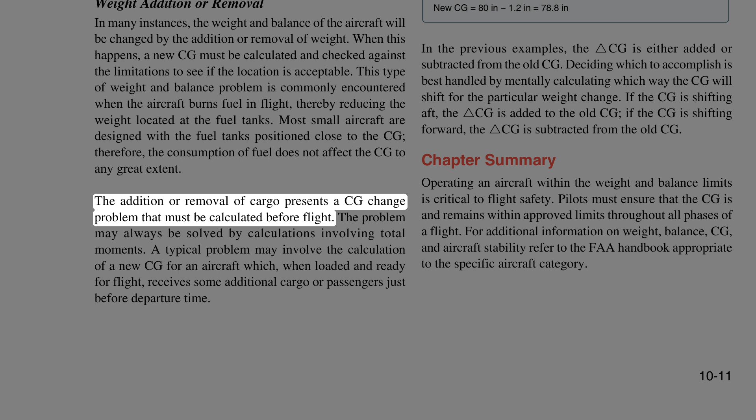Most small aircraft are designed with the fuel tanks positioned close to the CG, therefore the consumption of fuel does not affect the CG to any great extent. The addition or removal of cargo presents a CG change problem that must be calculated before flight. The problem may always be solved by calculations involving total moments.

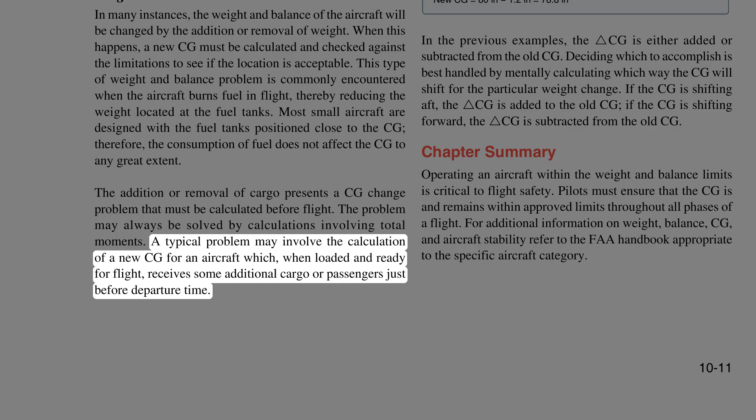A typical problem may involve the calculation of a new CG for an aircraft which, when loaded and ready for flight, receives some additional cargo or passengers just before departure time. In the previous examples, the delta CG is either added or subtracted from the old CG. Deciding which to accomplish is best handled by mentally calculating which way the CG will shift for the particular weight change. If the CG is shifting aft, the delta CG is added to the old CG. If the CG is shifting forward, the delta CG is subtracted from the old CG.

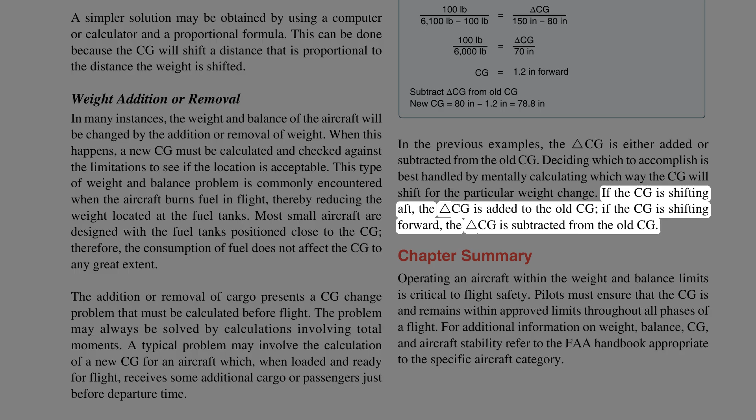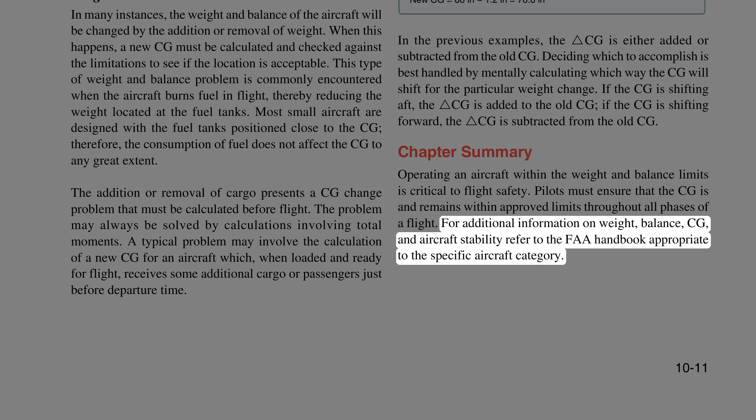Chapter Summary. Operating an aircraft within the weight and balance limits is critical to flight safety. Pilots must ensure that the CG is and remains within approved limits throughout all phases of a flight. For additional information on weight, balance, CG, and aircraft stability, refer to the FAA Handbook appropriate to the specific aircraft category.